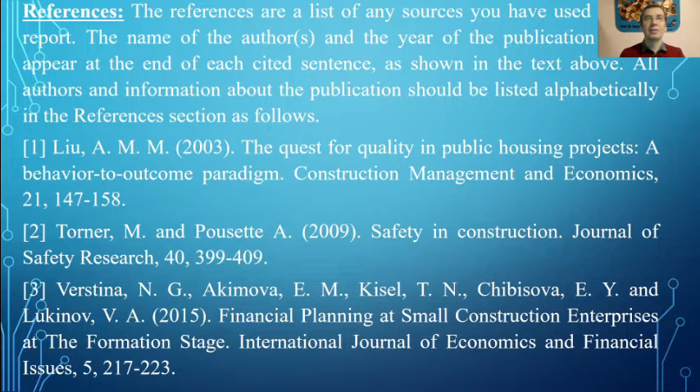We also provided you guidance about each one of those. And of course, references are very important. If you take any information from somewhere - a web page, a book, a magazine - you have to provide the reference. It's very important in all your work.

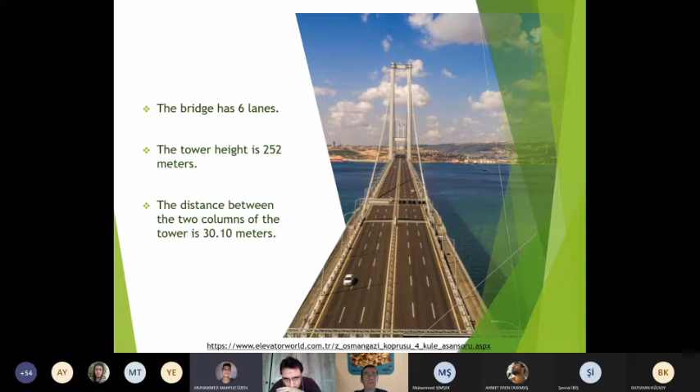The total length of the bridge is 2,682 meters. The length between the two towers is 1,550 meters, and the length of the side span is 1,132 meters in total. The towers of the bridge are 252 meters long, and the distance between the tower columns is 30.10 meters. Also, the bridge has 6 lanes.

This part is about the construction stage. In this project, the total excavation is 199,000 cubic meters.

The concrete used is 196,000 cubic meters, and the steel used is 83,400 cubic meters. 104 blocks were used on the steel legs, and 113 blocks were used on the steel leg of the bridge. The weight of each block on the steel legs is between 130 and 160 tons, and the weight of each block on the other steel leg is between 230 and 400 tons.

We found some photos about the construction stage: North caisson buoyancy operation, driving steel piles to the seabed, bridge steel shaft manufacturing in Tuzla, and steel deck placement procedure.

In this project, a special plan for quality management has been created. This plan has been carried out through two separate departments: quality assurance and quality control.

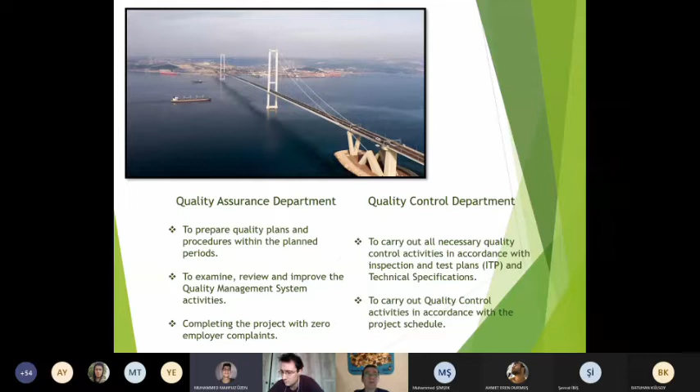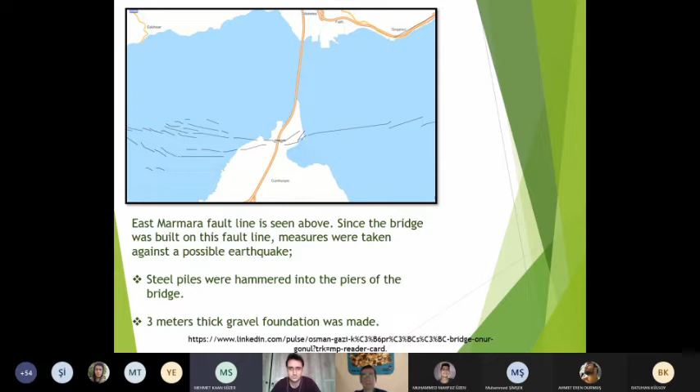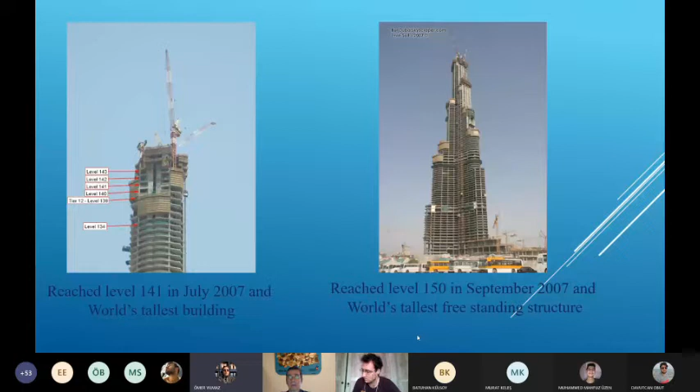Timeline: excavation started in 2004. They reached level 150 in 2007, and finally opening followed.

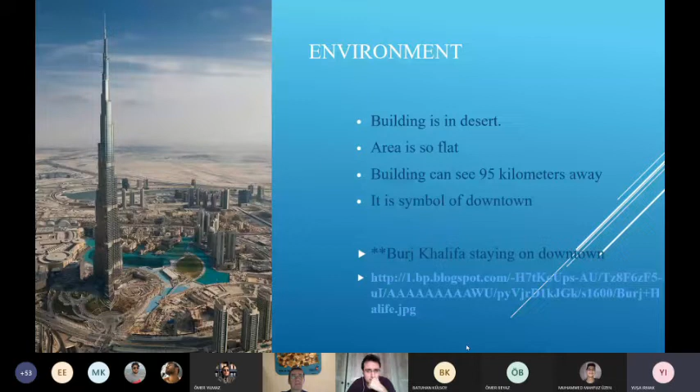The last topic is construction inspection. Burj Khalifa is the most powerful building against natural disasters. It has 200 embedded columns, an antenna 1.8 meters long, and the last 15 floors are made completely of steel. Thank you for listening. Now we can answer your questions.

Okay. Any questions? I have a question, Professor. Go ahead, please. What was the biggest problem encountered while building this structure?

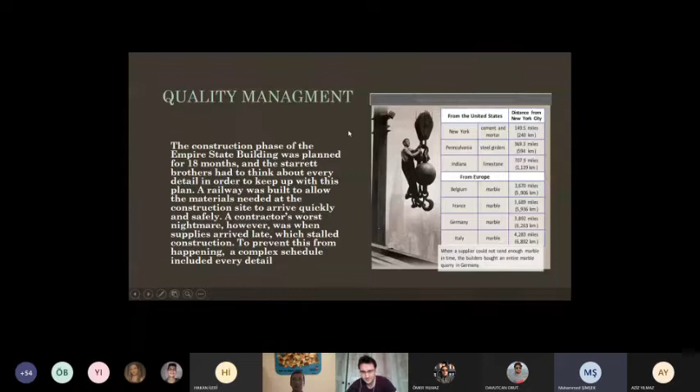As civil engineering students, we have to think about safety in every field we work in. Skyscrapers must have many safety criteria. As your building rises, the effect of the horizontal and vertical forces that you need to solve increases. The Empire State Building has experienced many earthquakes and storms to date, and the building has not been affected by these disasters. This was interesting information.

We know that a plane crashed into both the Empire State Building and the Twin Towers. After this incident, the Empire State was not destroyed, but the Twin Towers were. Researchers attribute this to the ratio of concrete and steel used in the building. The plane crash did only minor damage because 60% concrete and 40% steel was used in the Empire State Building. Thank you for listening to me.

You can ask a question if you have one. I've got a question for Aziz: what is the Art Deco style?

I will explain Art Deco style. Art Deco style was used in the Empire State Building. Art Deco style features straight and sharp lines, geometric shapes, aerodynamic forms, and bright colors that stand out in the buildings. The Empire State Building is the most magnificent Art Deco skyscraper in the world. Thank you for your question.

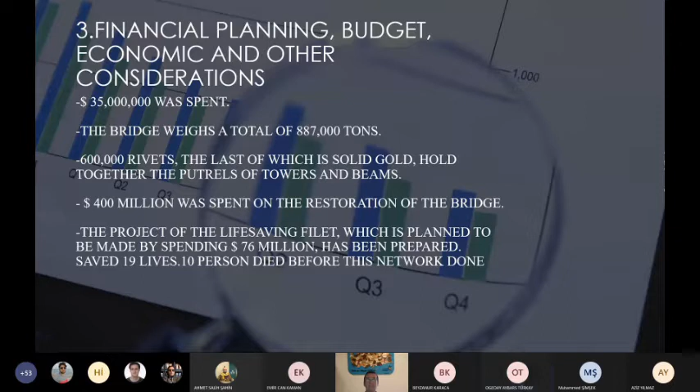Let's talk about design and construction planning. In 1921, Joseph Strauss presented a plan for a bridge that would cross the Golden Gate Strait. By the year 1929, consulting engineers Moisseiff and Ammann convinced Strauss to accept the fully designed bridge plan we see today. Individuals from 6 counties in Northern California voted to fund the Golden Gate Bridge.

Strauss assigned engineer Ellis to work with Moisseiff as a team. Test runs without computers were done through figures. They confirmed these figures through tests on a 1:56 scale steel tower model.

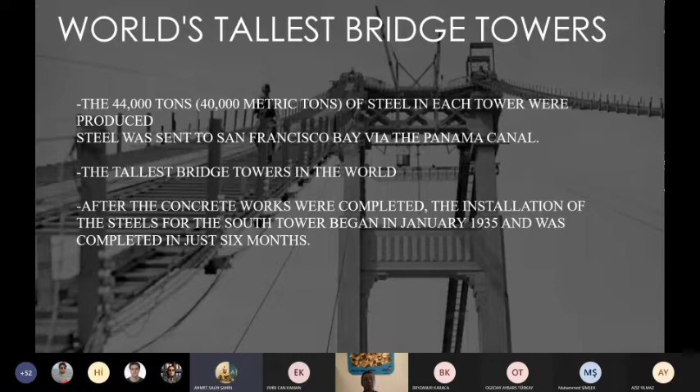After the concrete works were completed, the installation of the steels for the South Tower began in January 1935 and was completed in just 6 months. The last piece of the overall structure, the highway deck structure with its pavement, was in place on the 19th of April 1937, about a month before the bridge was opened.

In the end, the wonderful bridge is completed. The bridge was designed to be strong and durable, but constant maintenance and improvement is required to make it a permanent monument. Our next title is Quality Management.

Hi everyone, I will talk about quality management and safety concerns. In the construction of the Golden Gate Bridge, everything from the construction workers to the bridge itself is valid. Science and security are at the forefront. They have done all the work that can be done in the cleanest way. The most suitable materials were used in the construction of the bridge. Workers have been treated as human beings and their safety prioritized.

The highest quality work that could be done without any expense was done, with many safety considerations in the construction of the Golden Gate Bridge in San Francisco. Before this project, bridgemen had worked recklessly, without any safety precautions.

Joseph Strauss' safety innovations included a safety net underneath the entire bridge during roadway construction. 19 men fell into the net accidentally, yet none of them died. This group was famously called the Halfway to Hell Club.

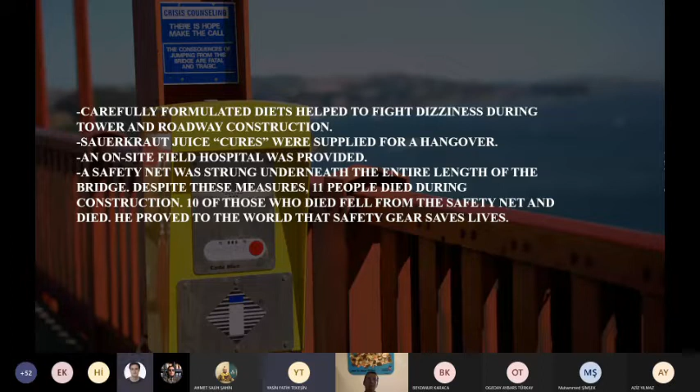It took 8 minutes. Please don't do that. Okay, next time. Next group.

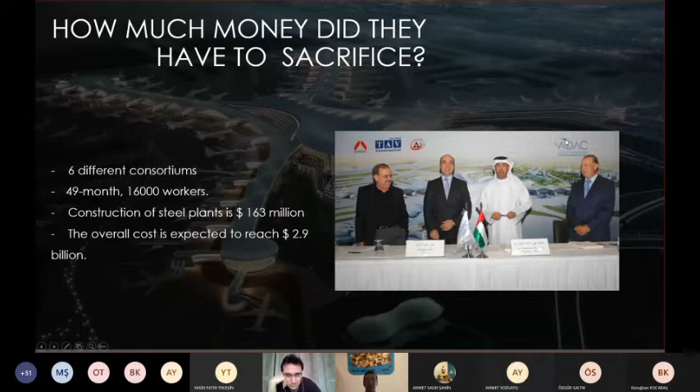And let's talk about design. The first striking feature of the building is its X-shaped design. The X-shape of the structure was designed not only to look aesthetically beautiful, but also to reflect the cultural and geographical values of the country.

The MTB project is in the middle of geographical elements that the Emirates sees as its own values. This was a great reason to construct and design the arms of the X to face these geographic regions.

The arms are represented by 4 totems in the center, designed as turquoise facing the sea in the north, yellow facing the desert in the south, red facing the city in the west, and blue facing the oasis in the east. Besides the aesthetic and cultural factors, the most important reason why the structure is in the form of an X is that it serves the purpose we mentioned at the beginning.

In this structure, which was built for transit use, the surface area and the instant passenger transfer capacity of the piers was increased thanks to the X shape. Also, the structure was placed between the two runways so that aircraft would approach the piers faster. Thanks for listening to me.

Hello, my name is Zid. Another title we have to talk about is Abu Dhabi International Airport's construction stage. Initially, Abu Dhabi Airport was constructed in 1982 with 3 million passengers capacity, but later it couldn't respond to local use and external demands, so they decided to expand its capacity step by step.

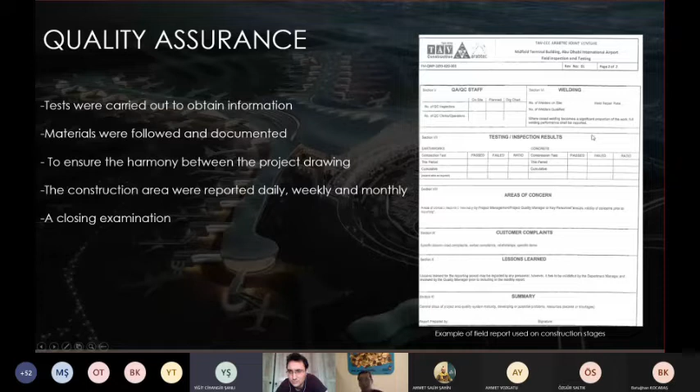In the Abu Dhabi International Airport project construction stage, they detected some injuries that may exist in relation with environment, lack of PPE, injuries, or expenses which are not included, and charted to take precautions against them. There are three levels of impact and five levels of frequency.

And the last subtitle is BIM. BIM is a collection of three-dimensional schemes used for the timely and smooth performance of tasks that different disciplines in the field need to work together.

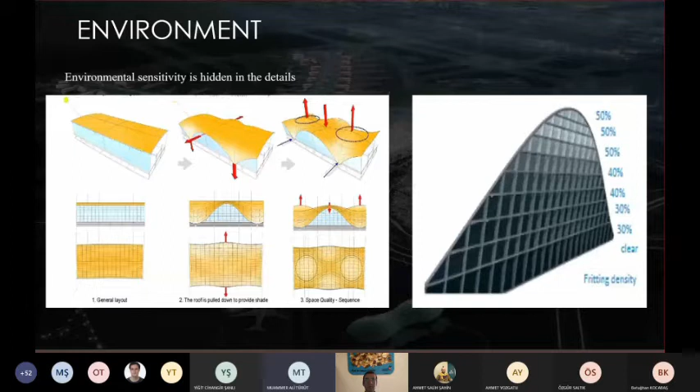On the other hand, there are many important applications such as carbon dioxide sensors, and an active stop-and-go system in luggage handling. Safety risks are one of the most important issues to consider before starting the project.

In order to reduce the impact of risks during the midfield terminal project, all employees were given safety training. Active use of personal protective equipment in the field is always mandatory, and a form has also been prepared to report any accident. Conclusion: as can be seen, the effort spent on building in this project is enormous.

Midfield terminal building requires the highest efficiency of different disciplines from start to finish. To summarize, the project covered the methods used, what different tasks different departments undertake on the same job, how to determine what to do in case of an undesired situation, and how all of these departments work together. Also, cultural and geographical factors were noted.

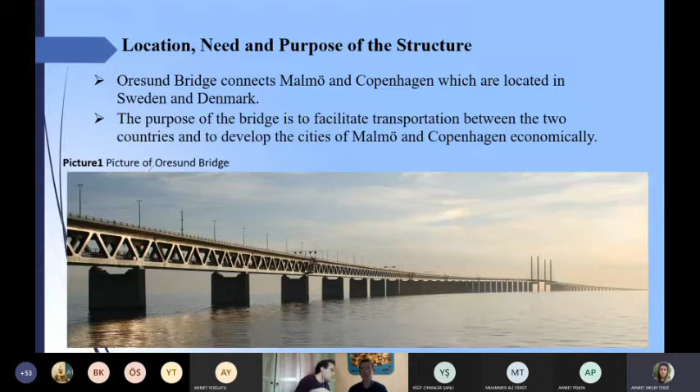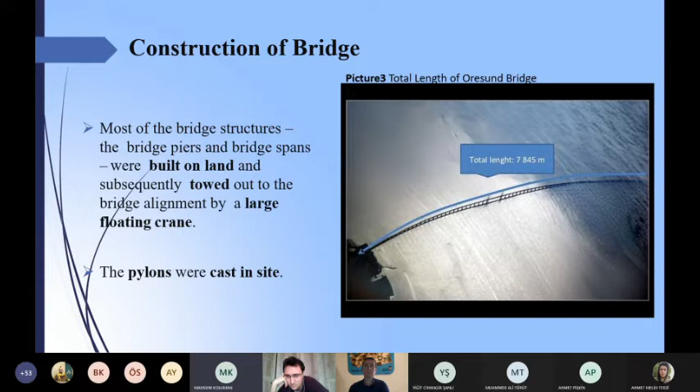Three main segments of the Öresund link. On the Denmark side, the link begins with a 2.2 mile underwater tunnel. The tunnel emerges from the water into a roadway on a 2.5 mile artificial island, Peberholm.

The island appears as a bright white shape to the south of the natural island in the design. The cable-supported horizontal bridge stretches 4.9 miles across the eastern part of the strait towards Sweden, making a thin white line across the image.

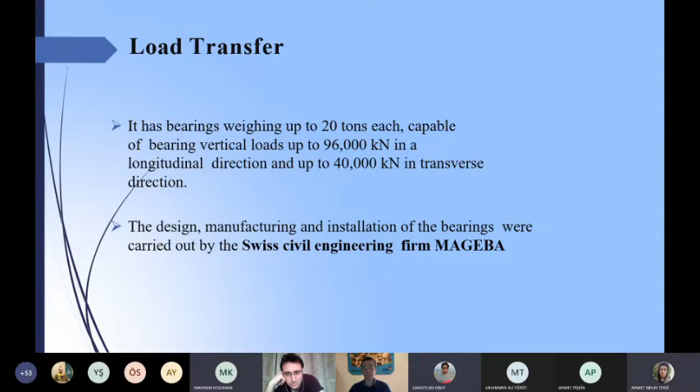Next page. The bridge has immersed tunnels, and each tunnel element is 176 meters long, 49 meters wide, approximately 9 meters high, and weighs around 57,000 tons.

Next page. We have some results after the bridge was completed: employment has increased throughout the region, and 1.8 to 3 million people are working in the region.

Around 35 million people travel this road every year. Air pollution has reduced by 50% as it replaced ferry transport, and circular mobility has increased.

Next page. For this page, you can check out our information about this presentation, and thank you for your attention. If you have some questions, we would like to answer them.

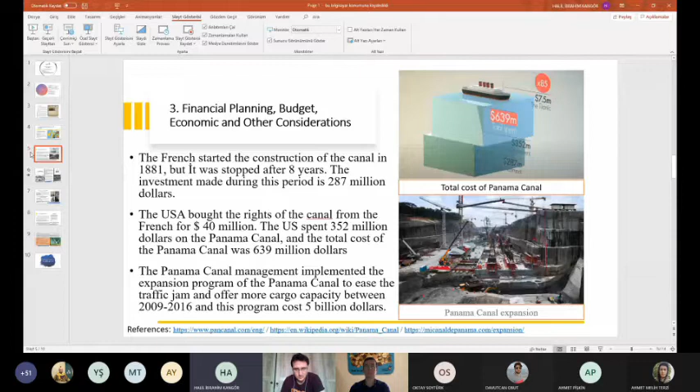Another issue is the design and construction planning. The design and construction planning of the Panama Canal was made according to the canal locks system. The locks in this canal have the same length, width, and depth. The locks in this structure are constructed in pairs to allow ships to pass in both directions at the same time. We see in the photo on the right the towing locomotives.

Another important point is the breakwaters. Breakwaters have been built at both entrances of the canal. These breakwaters protect the ports of entry and the structure from violent storms and strong waves.

Finally, the subject I will tell you is construction stages. The first attempt to build this canal was made by the French leader Ferdinand. About 22,000 workers died due to illness and accidents within 9 years of the project's induction. During the United States construction, John Wallace was the first chief engineer of the Panama Canal. Colonel George Goethals, another important name, completed the construction of the Panama Canal. Nearly 5,000 people died during the United States project management.

Thank you for listening. I leave the word to my friend. Thank you. Hello everyone, my name is Furkan. I will tell you about quality management, safety concerns, and environmental issues topics.

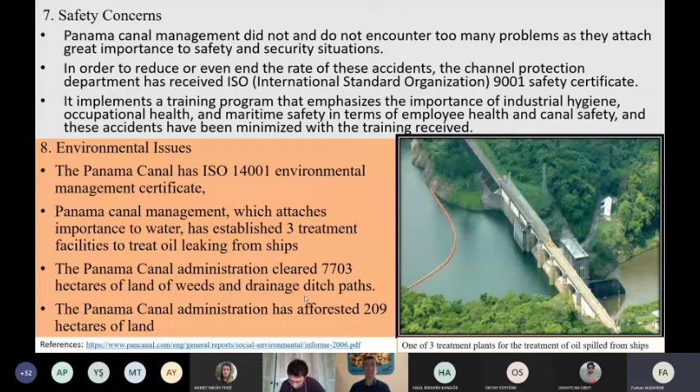The Panama Canal administration cleared 7,703 hectares of land of weeds and drainage ditch paths. The Panama Canal administration has afforested 209 hectares of land. Thank you so much for listening to us.

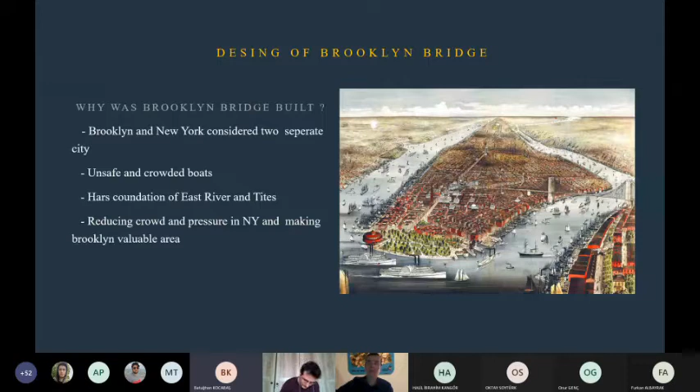Ferries could not be used in winter because the East River freezes. The other reason was reducing crowding and pressure in New York City and making Brooklyn a valuable area.

John Augustus Roebling's bridge design: he presented the master plan in 1867. The suspension bridge design has two neo-Gothic towers, and contains a roadway, rail, and walkway for pedestrians. In order not to block river traffic, he designed the middle of the bridge to bend upward.

He designed the overall superstructure. You can see this plan of the overall superstructure on the next page.

Towers of the bridge: for several years, the bridge's neo-Gothic towers were the tallest structures in the Western Hemisphere. Roebling intended the bridge towers and prominent arches to serve as a grand monument to the adjoining cities of New York and Brooklyn. Each tower contained paired Gothic-revival pointed arches through which the roadways run, built of limestone, granite, and Rosendale cement.

A watertight structure is generally used to work on the foundation of the bridge pier and construction of the concrete dam. The Brooklyn caisson was fired. When the Manhattan caisson was being built, it was covered with fireproof iron plate to prevent burning like the Brooklyn caisson had. You can see the third picture, the plan of the caisson.

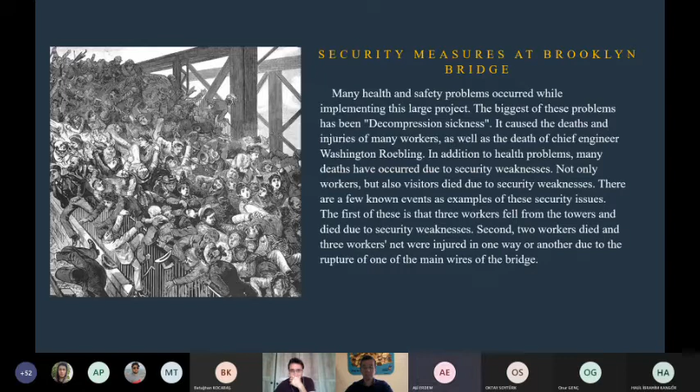My second subject is cost estimation of the Brooklyn Bridge. The cost of the bridge was announced as $15 million in 1883. The cost table of the bridge has changed due to changing exchange rates over the years and after restoration works. In 1999, the redeck of the road was completed at a cost of $34 million.

Finally, a $725 million spending plan was made for the rebuilding of the ramps and repainting of the bridge between 2009 and 2011. Thank you for listening.

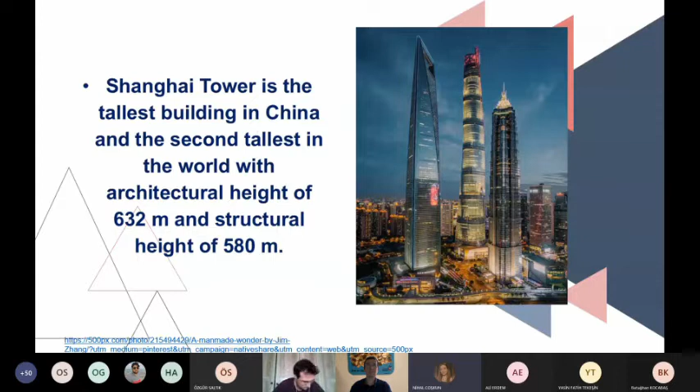Hello everyone, I'm Ayşenur and I will talk about location, need, design, and the safety parts of the presentation. Shanghai Tower is in the Lujiazui Finance and Trade Zone of Pudong. We can see the location of the tower in this picture that we took from Google Maps.

Now let's talk about why they needed to build this tower and what was the purpose of it. We can count 2 important reasons. First, Shanghai City has a horizontal city plan, so people who work in that district were wasting their time in transportation. Second was traffic congestion and pollution from automobile exhaust that the city had. All people working in that location caused these problems, so they decided to come together to meet. The purpose of the tower is to reduce all these problems with its sustainable vertical urbanism motto.

Here you see some parts of Shanghai Tower. There are parts for offices, observation decks, and retail places, but I will talk about that in the design section again in detail.

Hello everybody, I will talk about financial planning, budget, economic and other considerations, and environmental issues. The estimated cost of the tower is $2.4 billion. They had been planning the Shanghai Tower since 1993 because there were economic reforms in the late 1980s, and the government realized that the city would need a major project to meet all its needs.

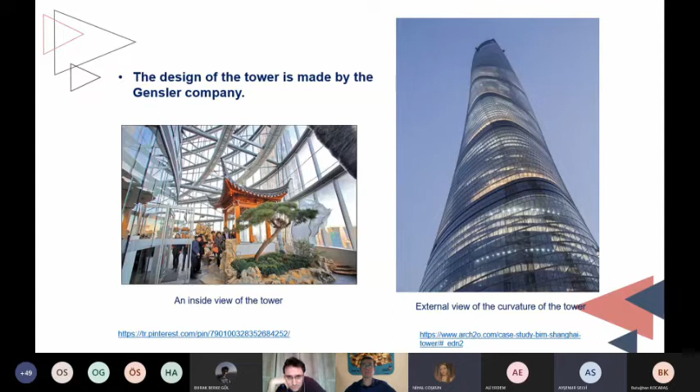Shanghai City has strong winds, and Gensler designed the tower according to this situation, giving it this shape. This is the optimal rotation angle, which is 120 degrees, to minimize the structural wind loads. With this shape, they reduced the wind load by about 24% and saved $58 million in materials.

The inside of the tower is organized into 9 zones, and every zone contains about 12 to 15 floors. Zone 1 is the base level, containing luxury boutiques, cafes, etc. Zones 2 through 6 are for offices. Zones 7 and 8 are for luxury hotels. Zone 9 is for the observation decks. These are plans of some of the floors of the tower.

Construction of the building started in 2008. The main party responsible for the project was Shanghai Construction Group. The construction crews laid the last structural beam of the tower in 2013.

In 2014, the tower exceeded 600 meters, and the internal construction was completed towards the end of 2014. The building started to be introduced gradually in 2016. We can see the construction stage of the tower here.

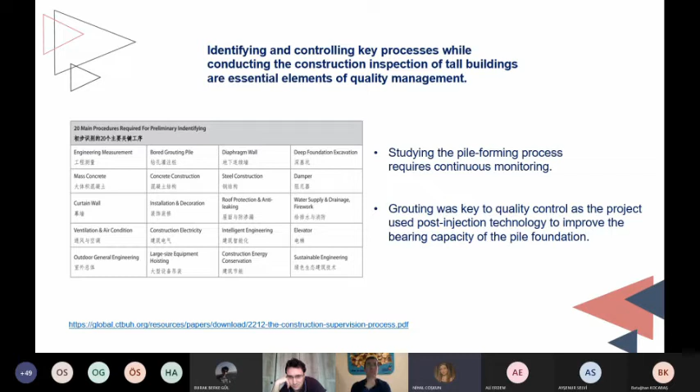While preparing this project, 20 basic procedures were defined initially. These procedures had to be revised in response to possible problems. The needs for components such as a bored pile, steel structure, internal and external shear wall, and support system were identified for the multi-section working unit.

For example, the pile forming process requires constant monitoring. It is necessary to ensure there are enough control points to guarantee the overall quality of the process.

Since the building has a successful system in energy efficiency, it makes a positive contribution to the environment. The tower has a total of 43 different sustainable technologies. They use wind turbines to produce their own electrical energy, and in this photo we can see the wind turbines of the tower.

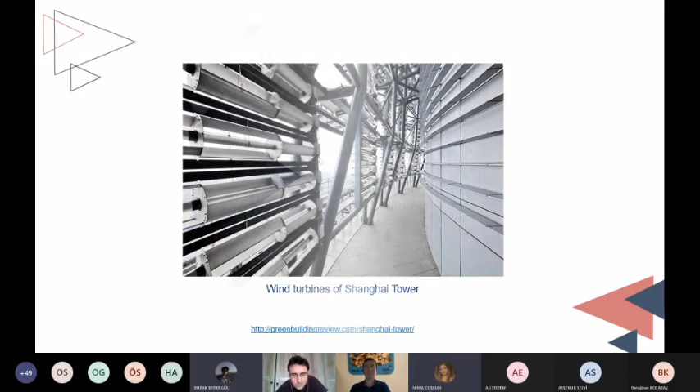Let's take some questions. I have a question, Professor. Can I ask? Yeah, go ahead.

This building has a little bit different design. Many materials were used in the construction of the building. So were there any difficulties in producing the materials?

I think that question is for me, so I can answer it. The shape of the tower required more than 20,000 wall panels, with more than 7,000 different shapes. It was too complex and costly to produce these components using traditional computer-aided design tools. So they applied a mass customization process with parametric software and laser measurement technology to produce all these wall panels and components.

Thank you so much. You're welcome. Yes, teacher, did any problems occur during its construction?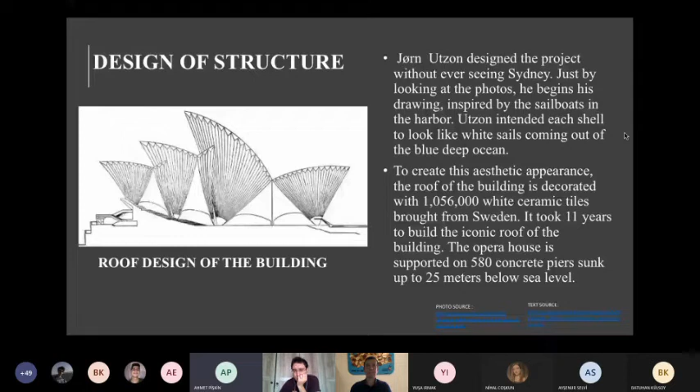It is your turn. Construction of structure. Thank you, Ahmet. Construction of the Sydney Opera House started in 1959, and the construction process took place in 3 stages. Next one. Thank you.

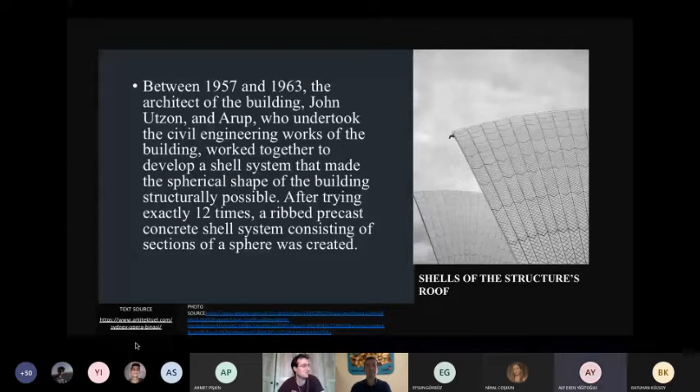The first stage took place from 1959 to 1963 and was completed with the podium construction. Next one. The second stage lasted from 1963 to 1967. The roof was completed at this stage. Next one.

The third phase of the project was continued by 3 architects who took office after Utzon's resignation, and many changes were made in Utzon's original design. Next one.

After the construction was completed, the building is 183 meters long and 118 meters wide, and covers an area of 1.8 hectares. Next one.

And while the estimated cost of the building was $7 million, the total cost reached $102 million.

Your turn, Efsun. Thank you, Alp. I'm gonna talk about some topics. Let's start with the safety part. Technology wasn't very advanced when it was implemented. Some workers even died during construction, but also there are some good points - next one - the building was built to withstand a 9.0 magnitude earthquake.

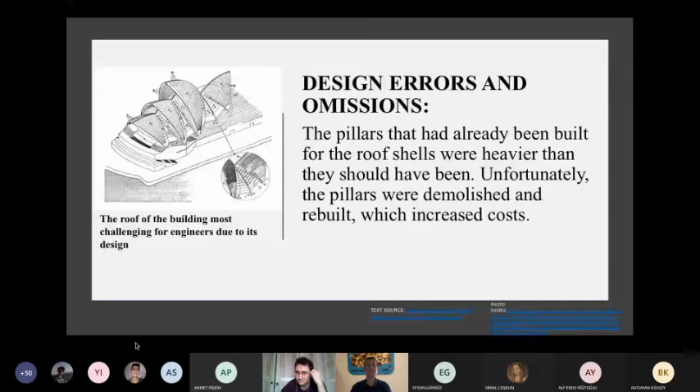The building is covered with ceramic-coated concrete shells that need regular maintenance, and they subsequently changed this primitive and expensive technique. Sydney Opera House has been awarded by the Australian Green Building Council. They received this award for implementing a new waste program, increasing efficiency in water use, and reducing energy use. Thank you.

I have a question. Yiğit Cengiz - yes, why was the structure awarded so late? Why didn't it get an award until 2003? Because this structure wasn't completed until the 1990s. It was completed at the beginning of 2000, so it received an award lately. Okay, thank you, I got it.

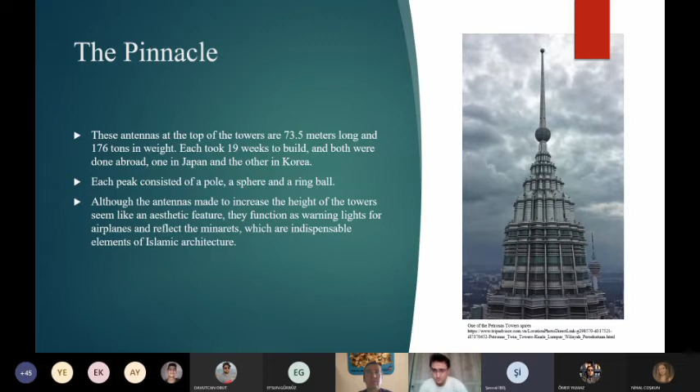The external face of the tower is clad in stainless steel and vision glass. The antennas at the top of the towers are 73.5 meters long and weigh 176 tons. A total of 83,500 square meters of stainless steel extrusion and 55,000 square meters of laminated glass were used for the coating.

For the security part, there are smart systems in both towers. The fire safety system closes the affected area and expels the polluted air. In addition, there is fireproof paint and stairs in the towers.

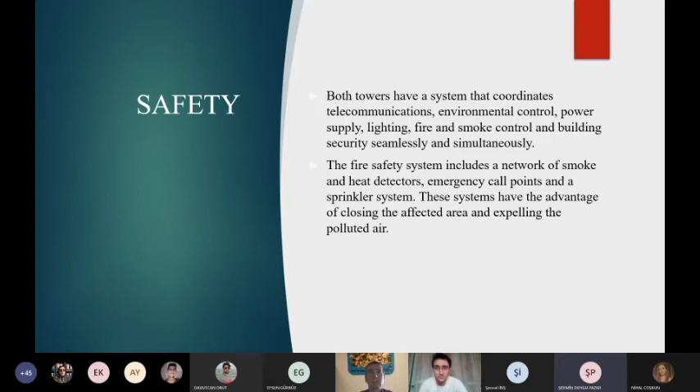Since Malaysia is an area of seismic activity, the towers are designed to be earthquake resistant. The towers have the world's largest foundation and plates that move under pressure. At the same time, the towers are constructed of high-strength concrete to reduce any vibration. I leave the words to Onur.

The Petronas Twin Towers is the 15th most expensive tower in the world. The cost of the towers is $1.6 billion. The skyscraper, which was tendered to two different construction companies, witnessed competition between them. These companies are Hazama and Samsung. This competition has been positive for the cost of construction and the time to finish.

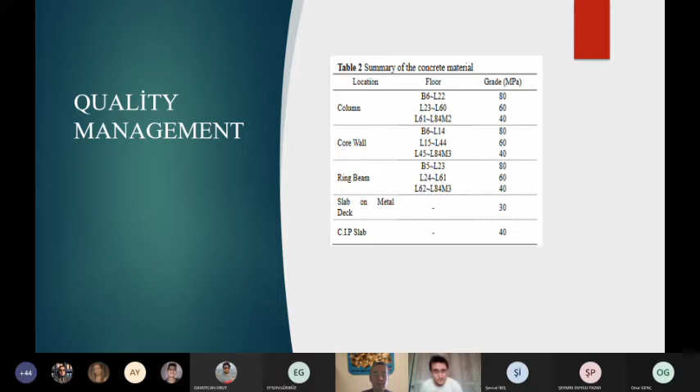The structure of the building consists of a dual system, consisting of a reinforced concrete core wall system and exterior reinforced concrete columns. Reinforced concrete has been chosen as the primary structural material for the lateral resistance system. This table is the summary of the project, and this table shows the structure of the concrete used.

For production of high performance concrete, the British standard is utilized as a basis for the contract documents, and high performance concrete is used significantly in the project. The definition of high performance concrete utilized for the project includes high strength, workability, and durability, as summarized in this table.

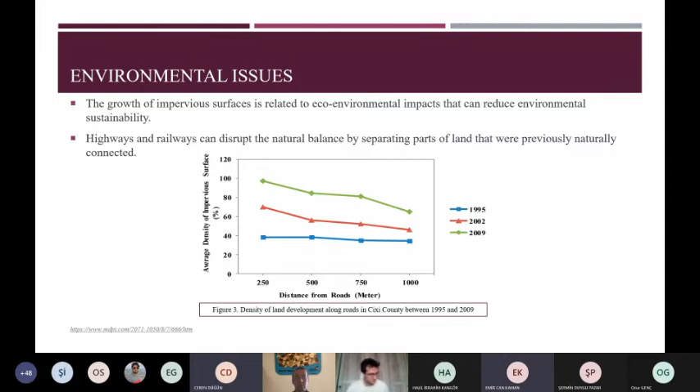Emir will explain the design of the bridge. The Hangzhou project's final plan took almost 10 years with the help of 120 technical studies and more than 700 experts from all over the world. In the project, the cable-stayed bridge design was used because it can resist adverse conditions, multidirectional currents, high waves, and geologic conditions. In total, 32.2 km of cable was used in this project.

The structure of the bridge was designed to seismic criteria, so it will retain durability in an earthquake of magnitude up to 7 on the Richter scale, and the Hangzhou Bay Bridge guarantees 100 years of service life. The bridge has a length of 36 km, and the width of the bridge is 33 meters. Also, the bridge is 62 meters above the ground, so it can enable fourth and fifth generation container ships to pass.

Construction stages: many bridges use concrete piles to support the deck, but the Hangzhou Bay Bridge took a different approach and used steel piles. Two large cranes were used in the construction of the bridge, one for 2,200 tons and the other for 3,000 tons. These heavy cranes were used to transport large beams from shore to bay, and the steel piles used were also transported using these cranes.

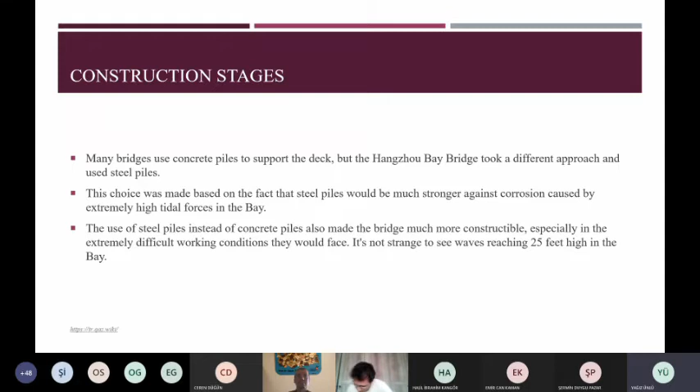Quality management: the Hangzhou Bay Bridge is in the form of a rope-supported bridge. This form was chosen for this project due to the robustness of the rope-supported bridge in adverse conditions. The choice of bridge form and construction material was based on strength against all the different forces the bridge would encounter. Steel piles are resistant to tides, and steel is extremely strong against corrosion, making it the best material for use in beams.

Safety concerns. The first safety concern was the difficulty of offshore construction. Another safety concern was corrosion of materials and cracking of concrete components. The third safety concern for designers and engineers was the toxic methane gas field, located about 50 meters below the bridge. Engineers have found a solution for all of them.

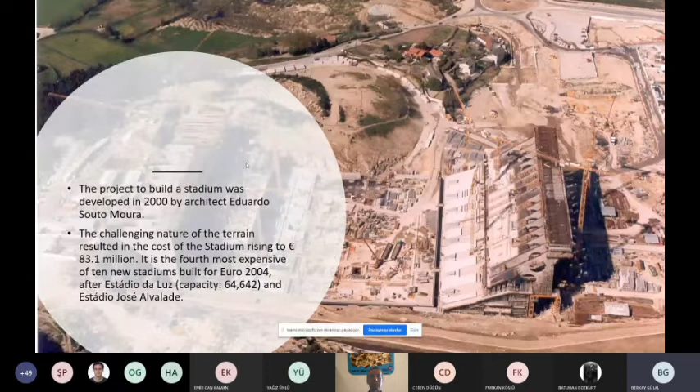It is the fourth most expensive of 10 new stadiums built for Euro 2004 after Estádio da Luz and Estadio José Alvalade. The architect's success in the stadium has won 3 awards. The most important of these awards is the Pritzker Prize. He won the Pritzker Award in 2011.

4. Construction stages. Construction consists of 3 stages: roof, stand, the field. 4.1 Roof. The difficulties caused by the structural difficulty of the stadium roof were overcome by aerodynamic test and the right material selection. Full locked cable were chosen as it makes more sense in terms of durability and sizing. In order to minimize the problem caused by different deflection, precast boards slated on the cable with a minimum layer of concrete casting were used.

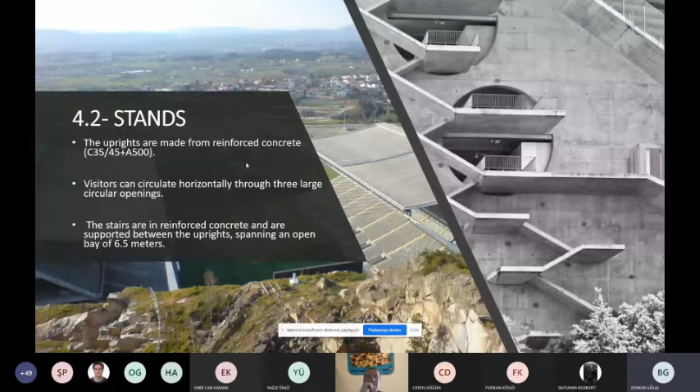4.2 Stand. The uprights are made from reinforced concrete. Visitors can circulate horizontally through 3 large circular openings. The stairs are in reinforced concrete and are supported between 2 uprights, spanning an open bay of 6.5 meters. 4.3 The field. Structurally, the zone underneath the field is formed by circular columns capped by circular sections of diameter 0.7 meters, which support the mushroom-shaped slabs of floor -1 and the ground floor.

Five, quality management. Braga Stadium is a very well managed stadium in terms of quality management. Aerodynamic tests and correct material selection have been made. The continuous monitoring program set up around the suspension ceiling measured wind, temperature, and acceleration over 8 months.

Environmental issues. There are three main environmental problems. The first is air pollution. The second is the problems arising from waste. The third environmental problem is the problems that occur during construction. That is the most significant environmental problem for us.

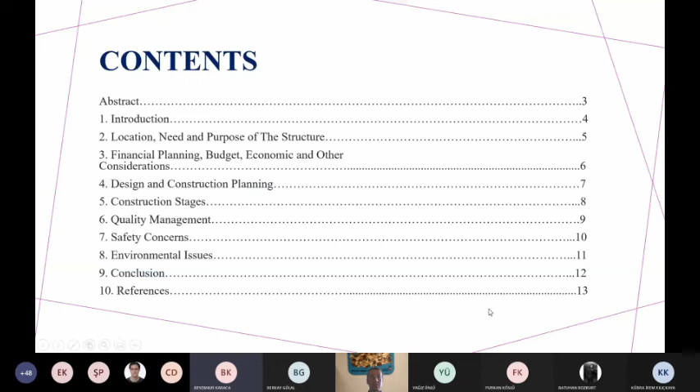The Eiffel Tower is one of the country's most important cultural heritage sites. It is 300.5 meters high, without the antenna. However, it was unpredictable that things would get to this level when it was first built. When the project was completed, the license agreements were based on the life of the building for only 20 years, and it was anticipated that it would be demolished soon.

However, this decision was abandoned after seeing how functional it was as a broadcast station and the number of tourists it attracted. The Eiffel Tower had been the tallest structure in the world for 40 years, but with the construction of the Empire State Building, this title was taken away.

Hello everyone, I'm Gazel. Today I will be talking about location, need and purpose of the Eiffel Tower, financial design and construction planning. The Eiffel Tower is an important symbol of Paris, marking the 100th anniversary of the French Revolution. It was built as the entrance gate to the Expo 1889 exposition, which was held as part of the year's celebration.

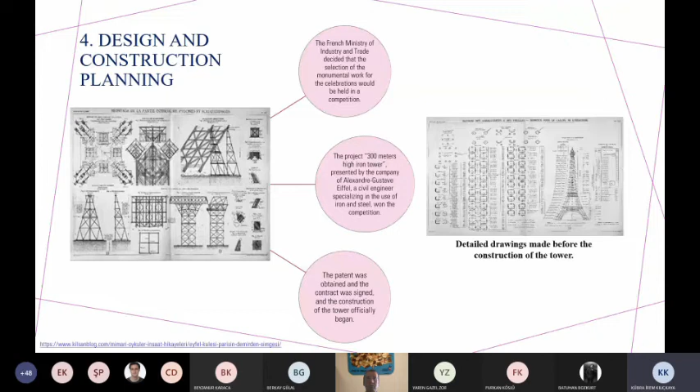Thank you for listening to me. Iram will continue. Hello everyone, I'm Iram. I will talk about the construction stage, quality management and safety concerns.

Construction began on January 28, 1887, when the foundations of the tower were excavated, and ended in 26 months, a record pace considering the basic tools available at the time. All elements to be used in construction were prepared in the factory of Gustave Eiffel. In the construction of the tower, 18,000 iron pieces and 2.5 million rivets were used to mount them.

This was a well-known technique under construction. The tower was built with wooden scaffolds and small cranes fixed directly to the tower. Quality management: the assembly of the tower was a wonder of precision for the period. The design was so successful that the top of the tower only moves 2 to 3 inches in strong winds. In sunny weather, the sun-facing side of the tower can expand and slide up to 7 inches.

Safety concerns. Gustave Eiffel was an innovator in addressing the risk of physical injury and death during construction. Tall buildings are completely closed and falls are limited to a single floor. This risk is reduced by using moving screens, guardrails, and safety screens. Therefore, only one death was encountered.

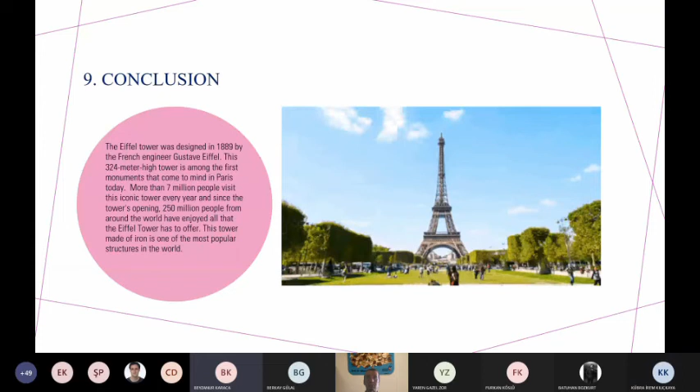Professor, can I ask a question? Go ahead, please, the floor is yours. I didn't see information about the construction area. I will ask, what's the size of the area where the Eiffel Tower is built?

I think I can answer this question. The Eiffel Tower is located in an area of 200,000 square meters.

Thank you. You're welcome. I have a question, Professor. Can I ask? Go ahead. I guess you didn't tell us, or I couldn't hear that. If you know, what is the total weight of the tower?

I can explain this question. The total weight of the Eiffel Tower is around 10,000 tons, with 7,000 tons of iron and other materials.

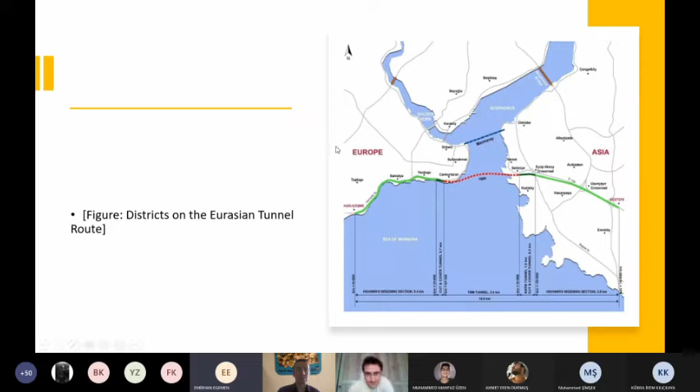I will continue our presentation with the benefits of the project. One of the most important benefits is that traffic jams have been reduced. You can see the other benefits happening along with reducing traffic density. Let's move on to the cost.

The project was realized with the build-operate-transfer model. As shown in this picture, the tunnel investment totals $1,245 million. While $285 million was provided by Yapı Merkezi, a $960 million international loan was provided for this project. That's the other one.

In this slide, you can see information about the workforce. While 2,124 employees took part in the Eurasian Tunnel project, a total of 250 construction equipment was used in the construction. And these are some photos of the road construction stages.

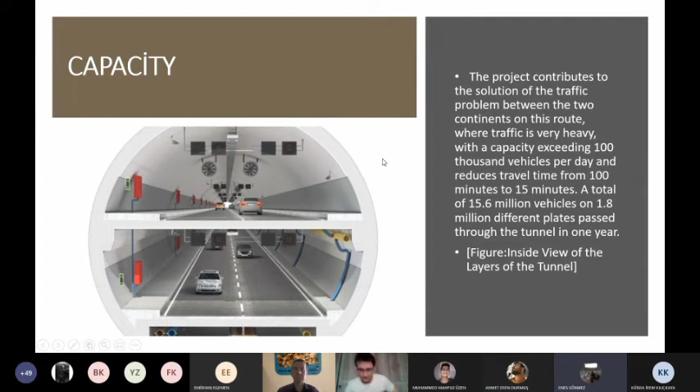Let's examine the tunnel boring machine in detail. The tool in this photo is a tunnel boring machine. It can carry all kinds of materials from rock to sand. The diameter of the tunnel can be between 1 meter and 19.25 meters. In this photo, we see a table containing the features of the tunnel boring machine.

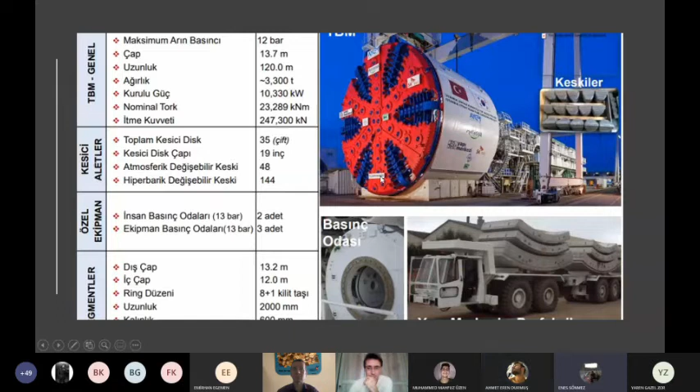Like any structure, the Eurasia Tunnel affected its surroundings when it was under construction. Now we will show you a short video about the Eurasia Tunnel and its environmental impacts.

My friends and I tried to summarize the Eurasia Tunnel in numbers on this slide. This is how we summarized the general characteristics of the Eurasia Tunnel, but we prefer to wait a bit and let others read whatever part they want instead of reading from the slide here, because we have trouble with time. If everyone looks, I will pass the page.

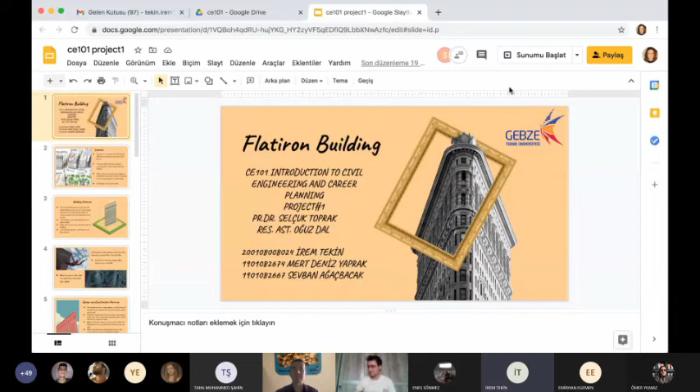Hello everyone, I am Irem. Today we will give you a small presentation about the Flatiron building.

The Flatiron building has never been the tallest building. However, the building attracts a lot of attention from photographers and tourists. The building has become a symbol of New York. There are offices in the building. The area where the building is located is called the Flatiron area.

Although the history of the building is old, it also brings out various beautiful scenes, as we see in the pictures. In these pictures, we see frames from the Spider-Man and John Wick movies. Of course, the building was not used only in these two films.

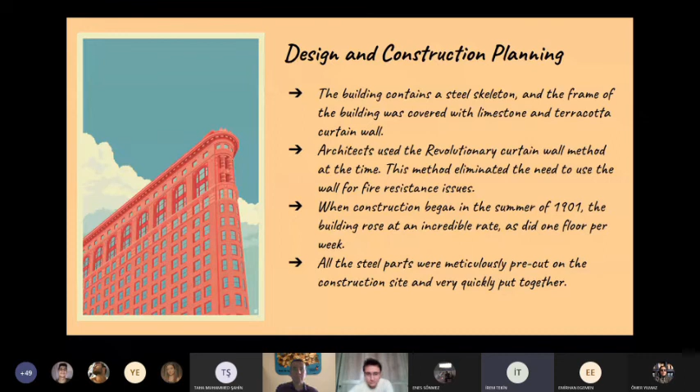We examined the design and construction planning under various headings. Construction started in the summer of 1901 and rose faster than expected. There is a steel frame in the building. The frame of the building is covered with limestone and terracotta curtain wall. The building is fire resistant.

Hi, I am Mert. I will talk about risk, cost, and design for the Flatiron building. First, the steel frame structure, then the limestone and terracotta envelope were added. The steel support allowed the building to withstand 4 times the wind force it could be expected to withstand.

3 years after its completion, it was decided to build a total of 22 floors, adding a penthouse to the top of the building.

The entire understanding of the building is based on the principle of the classical Greek column: pedestal, main body, and capital. The building is covered in limestone with copper-clad windows, the main body of which is pale and terracotta.

The bricks were red when first built. In this photo, we see the floor plan of the Flatiron building, and mostly office apartments are available in the building.

The entire facade is elaborately decorated with design and motifs reminiscent of French and Italian Renaissance architecture. The value of the 22-story Flatiron building, which has been earmarked by the city for development into a hotel, is estimated at $190 million. The area where the building is located is known as the Flatiron Fuller area, with the building's own name.

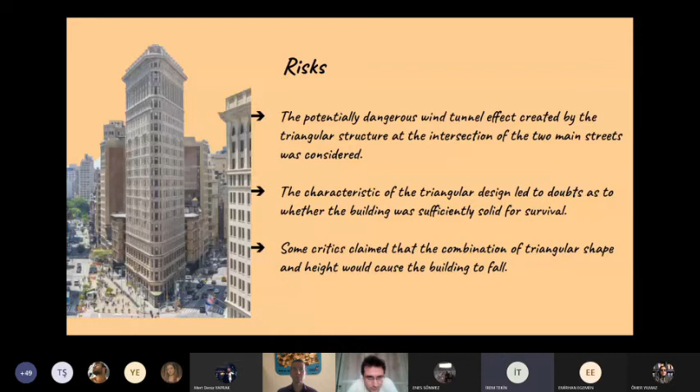New Yorkers paid immediate interest in the building, making bets on how far the debris would come when the wind knocked it down, and nicknaming it the Flatiron because of the resemblance of the building with the flat irons of the time. In this photo, we see the back view of the Flatiron building.

A quality management system, which is QMS, is a collection of business processes focused on consistently meeting consumer requirements and enhancing their satisfaction. It is aligned with an organization's purpose and strategic direction.

It is a superstition that it is the oldest skyscraper in Manhattan, and this title belongs to the Park Row building.

And the processes are as follows: calibrations, internal audits, corrective actions, preventive actions, purchasing and supplier selection, and monitoring. These processes require the performance of these processes to be measured, analyzed, and continuously improved, and the results of this form an input to the management review process.

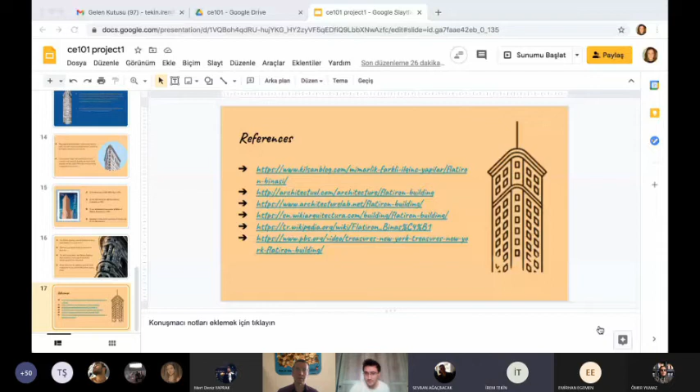Professor, I have two questions. Can I ask? Go ahead, please. This building is a high building and a very famous building. Has anyone ever committed suicide? And why does it look like an iron? I can ask first.

Go ahead, why does it look like an iron? I can answer. Actually, the building has a triangular structure, but it looks like an iron. It was called the Flatiron building because actually it has a triangular structure, not because it's made of iron. Thank you so much. Thank you.

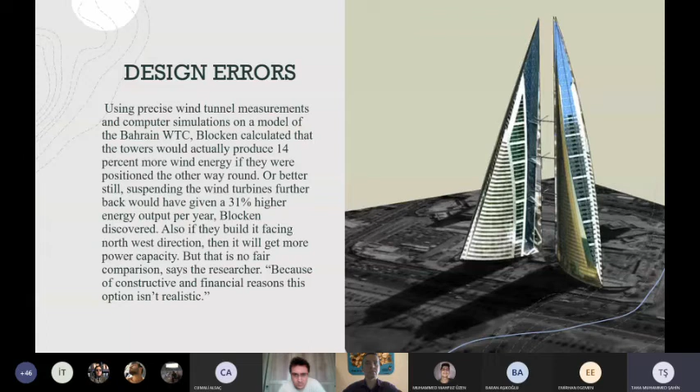Based on a model of the Bahrain World Trade Center, Blocken calculated that the towers would actually produce 14% more wind energy if they were positioned the other way around, or better still, suspending the wind turbines further back would have given a 31% higher energy output per year, Blocken discovered. The turbines were commissioned in 2007, and global interest was received from environmental and architectural bodies, media and private institutions across the world, with their distinctive, instantly recognizable design and utility. Thanks for listening.

Well, it's hard to ask questions. I think we couldn't hear exactly, but if there are any questions, I have one. What feature of this structure were you affected by? Okay, the turbines of this structure caught our attention because we thought it was very smart to have turbines to generate energy between the twin towers. Thank you. You are welcome.

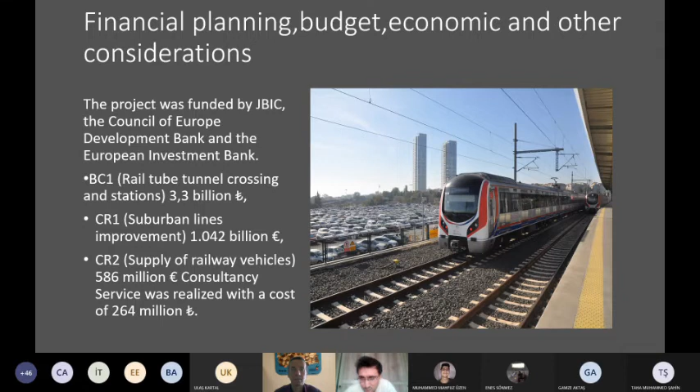The idea of Marmaray was put forward by Sultan Abdülmecit in 1860. The first design was made under Abdülhamid by French engineers in the 19th century. This was different from the present design. Their idea was making pillars on the ground of the strait and placing the tube on these pillars. This plan couldn't be carried out because of a lack of technique.

In 1987, the first feasibility studies were carried out by the government. They concluded that making this project was technically applicable and cost efficient. After 10 years, they signed a funding agreement. The construction officially started in 2004 with geotechnical and bathymetric studies.

The construction stage consists of 3 stages. The first one, BC1, the tunnel construction. The tunnel elements were made in Tuzla, then linked under the strait. This phase was delayed for 5 years because of archaeological remains.

The second phase was the CR1 and CR3 stations modernization construction. CR1 is the Halkalı-Sirkeci Railway and CR3 is the Gebze-Haydarpaşa Railway. These railways were renovated and link two continents with the immersed tube tunnel. This phase was also delayed for 6 years. The last phase is the CR2 railway vehicle supply, with 440 vehicles supplied by Rotem.

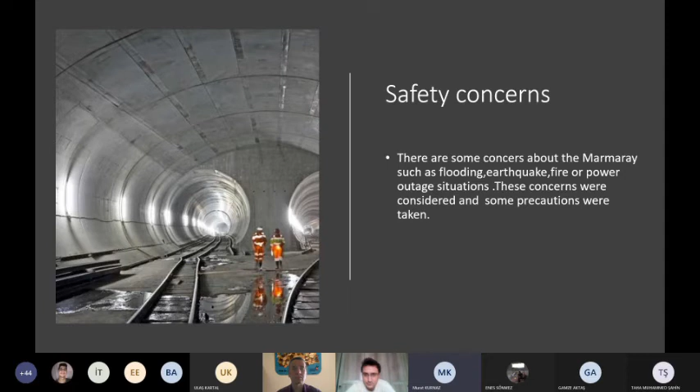Secondly, safety concerns: there are some concerns such as flooding, earthquake, fire, or power outage situations. These concerns were considered and some precautions were taken. Finally, environmental issues: there are some environmental issues, for example traffic congestion, noise, vibration, dust, and sludge.

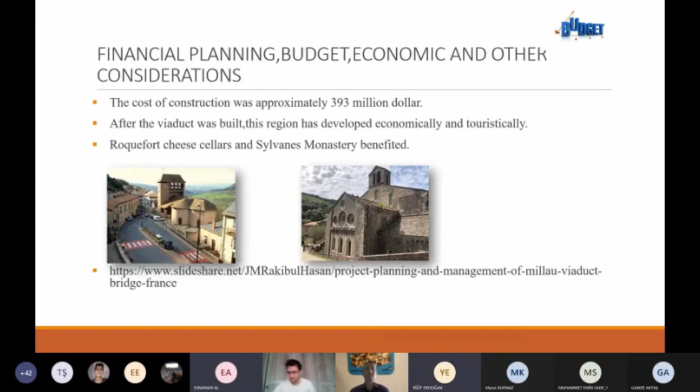Financial planning, budget, economic and other considerations. The cost of construction was approximately $393 million. The construction of the Millau Viaduct has also contributed to the positive growth of the economy in the city. After the viaduct was built, this region has developed economically and touristically. Roquefort cheese cellars and Sylvanes Monastery benefited.

Yes, okay. The next one is design and construction planning. An excellent product of the collaboration between engineers and architects, the Millau Viaduct was designed by engineer Michel Virlogeux, who is a French civil engineer, and Norman Foster. I can easily say this bridge is a work of art because it combines function, aesthetic, and technology.

Three basic elements were discussed in the planning of the construction stage. The first one is security, because it was very risky to build a 36,000 ton and 2.5 kilometer motorway on 7 piers, 250 meters above the Tarn River.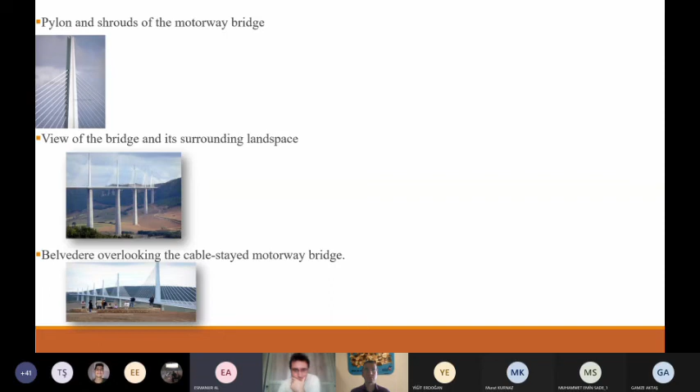There are 5 high quality definition images. First picture, cable stayed motorway bridge. We can see a long motorway. Second picture is the piles, deck, pylons and shrouds of the motorway bridge. We can see the pylon and shrouds in more detail in picture 3. This is a view of the bridge, and the last picture shows overlooking the cable stayed motorway bridge. With these pictures, we have examined the high quality properties of the viaduct.

That's it. Okay, the next one is construction stage. The construction officially started on 16 October 2001. November 2002, completion of the first pier. You can see the pictures, the piers. February 2003, the laying of the pieces of the roadway. November 2003, the completion of the last legs.

And you can see the celebration of finishing the last legs. They are celebrating. In the second semester of 2004, placement of the floors and poles, removal of the temporary supports. You can see the temporary supports in this picture. On 14th December 2004, official opening by the government.

The next one is safety concerns. Many difficulties were encountered in the construction of the bridge. The first problem is wind, a very compelling factor, with wind speeds of 225 km per hour at the location of the bridge. As we see in the picture, a very difficult cable network was used on the bridge. It consists of 7 steel poles with a weight of 700 tons and a length of 87 meters. The length of each steel pole is different from each other.

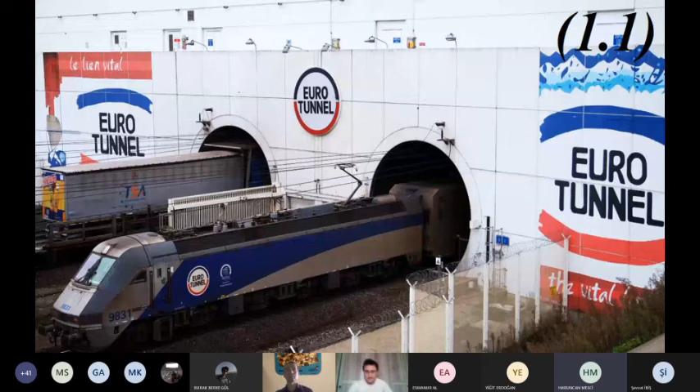If we continue with the entrance in England, this is the entrance from England into the Eurotunnel. These are the trains that carry passengers, and the further one is the one which supplies and carries goods.

So let's continue with the construction stages. Digging started in 1988 with tunnel boring machines, TBMs, which were used for all the tunnels. 5 TBMs dug from France, 6 TBMs dug from the UK, and they linked between the English and French sides under Dover. The TBMs started work on the service tunnel first, so engineers could see what the actual ground conditions were like.

Like I said before, they found the chalk marl to build this tunnel. The 2 crossover caverns were built using access from the service tunnels. TBMs digging the main tunnels passed through the caverns and then plunged back into the chalk to carry on digging. My presentation is over, now I am leaving it to Bülent.

Okay Harun, thank you. Ground conditions at the French end were worse than at the British end. This meant the French machines moved more slowly and that British TBMs dug more of the tunnels. Engineers used 2 systems of tunneling: cast iron segments bolted together, and precast concrete rings. The TBMs excavated a huge amount of chalk on the French side. The chalk was crushed, mixed with water, and pumped behind a specially built dam at 37 meters height. On the British side, engineers used the chalk to build a landscape platform at the foot of Shakespeare Cliffs near Dover.

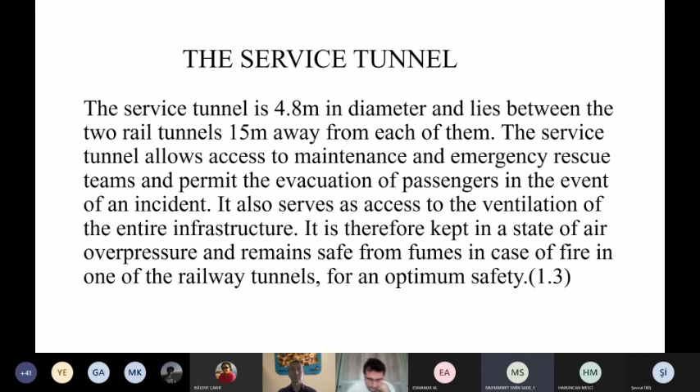Next page. In picture 1.3 we can see the service tunnel. Also in the service tunnel, electric and diesel vehicles are used for the maintenance and transport system.

Next page. Finally, I will talk about the cost of the Channel Tunnel. The cost of the channel tunnel: an initial equity of £45 million was raised by CTG FM, increased by £206 million private institutional placement. £770 million was raised in a public share offer that included press and television advertisements. A syndicated bank loan and letter of credit arranged £5 billion.

Privately financed, the total investment cost at 1985 prices was £2.6 billion. At the 1994 completion, actual costs were, in 1985 prices, £4.65 billion, an 80% cost overrun. The cost overrun was partly due to enhanced safety, security, and environmental demands. Financing costs were 140% higher than forecast. Thanks for listening to us.

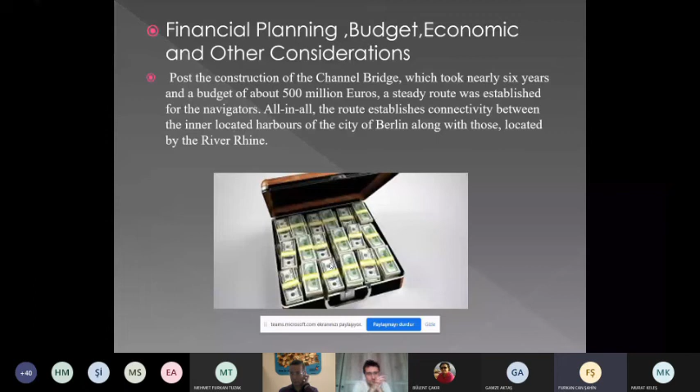The design of the building had a spatial signification. Spatial characteristics of the building are the pylons at the beginning, at the transition to the actual transfer of the Elbe, and at the end emphasizing the transfer of the Elbe in the flat land space.

Besides, there is the spatial form of the columns. The columns are swung ship-like and rib-shaped and give the bridge a unique shape, whereby the navigation-related task of the building is reflected.

Environmental issues: besides its excellent engineering, the Magdeburg Water Bridge is a good example of environmentalism. It is also proof that technology can keep water, air, and green intact and even protect green. Thanks for listening.

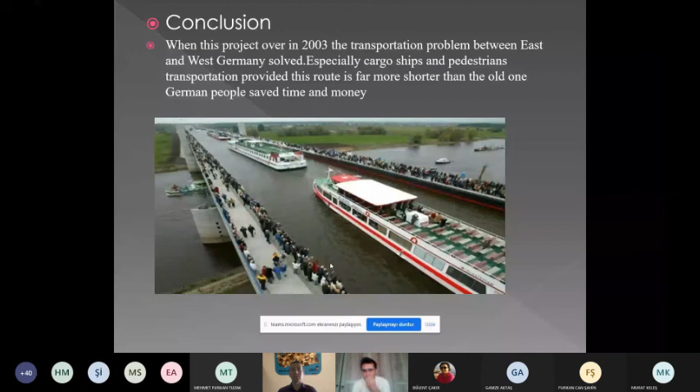Yes, can I ask, Professor? Go ahead. Why did it take so long to finish this project?

I can answer this. It's because when they started, the technology was not too good, I think, and the world wars and economic crisis delayed it too many times. And when the reunification with Germany began, they finally were able to complete this structure. So I think this is the answer.

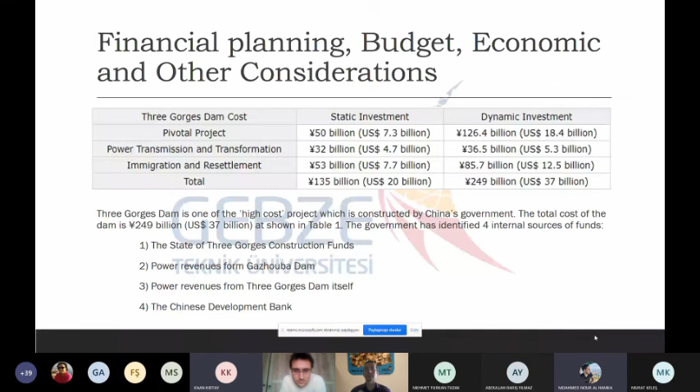There are also external sources that are quite important. Canada's Export Development Corporation and Germany's Export-Import Bank, and other international export credit agencies, provided the early loan guarantees for the project, totaling hundreds of millions of dollars.

The Shenzhen Development Bank signed a loan package with a German bank in 1997 for the purchase of turbines and generators. In 2004, the Chinese Development Bank hired UBS, HSBC, Citigroup, and many other banks and companies to help raise another 1.5 billion euros from bonds.

Now the question is, how efficient is the Three Gorges Dam, or is it a waste of money? Actually, the Three Gorges Dam is one of the most efficient projects the Chinese government has done. It was estimated in 2009 that the construction cost would be recovered if the dam generated 1,000 terawatt hours of electricity within 10 years. But in 2013, the full cost of the Three Gorges Dam was recovered, much earlier than expected.

The dam gets more than $7 billion in income every year, of which the net profits reach nearly $3 billion. So we can see how it plays an active role in the Chinese economy.

In the design part, the dam type is a concrete gravity dam with a total axis length of 2,309 meters. The dam crest elevation is 185 meters, and the maximum height is 181 meters. The generation structures consist of 3 powerhouses and 1 power station.

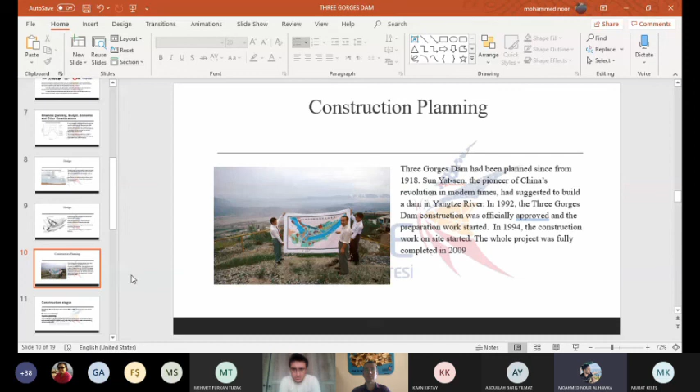The construction had 3 stages. Before these, there was a preparation phase from 1992 to 1994. After the dam's approval, preparations began, including establishing the organization to manage the project, raising funds, designing the dam in detail, commandeering lands, and migrating residents.

The first stage ran from 1994 to 1997. The damming of the diversion channel was formally opened to navigation, and the Yangtze River was successfully dammed.

The second stage ran from 1998 to 2003. Construction of the temporary ship lock began, the tunnel of the ship lock was dug and concrete pouring began, and construction of the flood discharge embankment was completed. The diversion tunnel of the Yangtze River was successfully dammed. The biggest hydraulic turbine generator in the world was successfully hoisted into position, and the permanent ship lock, with double lanes and 5 steps, was tested as the reservoir began to store water.

The final stage ran from 2004 to 2009. The electricity route delivering power to Shanghai went into operation. All 14 generating sets on the left bank were put into production, one year ahead of schedule. On September 15, 2009, the actual raising of the water level to 175 meters began. The multiple roles of flood control, electricity generation, and navigation would be brought into full play.

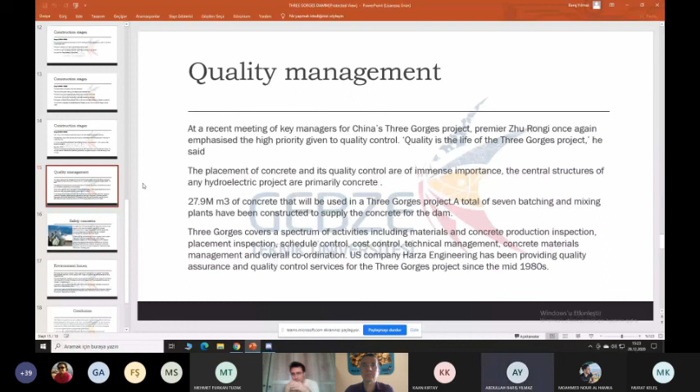The 185-meter Three Gorges Dam has been one of China's most expensive and most controversial engineering projects, submerging entire villages, displacing millions of people, and disrupting ecosystems. Critics say it has also increased earthquake and landslide risks in the region.

Chinese experts have dismissed rumors hyped by some Western media that the Three Gorges Dam, the world's biggest hydropower project, is at risk of collapse. The earthquake administration says the dam is capable of holding far larger inflows than it is seeing now.

First conceived of a century ago as a means of controlling flooding along the Yangtze, the Three Gorges Dam displaced more than 1 million people. 1,500 villages, towns, and cities vanished as dam building flooded the area.

The Three Gorges Dam, according to some, has the potential to be one of China's largest environmental nightmares. One of the most immediate environmental effects has been increased landslide activity. Landslides in the surrounding areas have been much worse than predicted, and dozens of people have already died as a result.

Another major issue with the dam is the way it is affecting biodiversity in the area. Animal and plant life has been greatly threatened due to flooding of some habitats and water diversion in others, furthermore causing fragmentation of habitat.

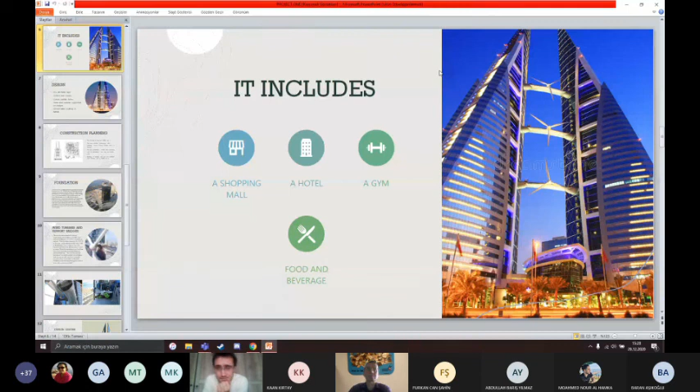About its design, it's 240 meters high, and these twin towers have 50 floors. It has curved and sail-like forms, 3 wind turbines supported on bridges, and finally, it's the second tallest building in Bahrain.

Construction planning: the site has an area of 120,000 square meters, and this area contains landscaping, office buildings, an anchor tenant, garden court, and car parking. The plan remodeled a hotel and shopping mall in a prestigious area near the Arabian Gulf.

Its parking and mall area is 88,617 square meters, and its floor area is 16,500 square meters.

About its foundation, each tower has a separate continuous piled raft foundation at basement level, and the loads acting on the piles are predominantly dead loads, imposed loads, and wind loads. Individual piles were modeled in the finite element analysis as vertical springs.

And that's the end of my presentation. Well, thank you very much. Thank you very much, Professor. I'm so sorry again. No problem.